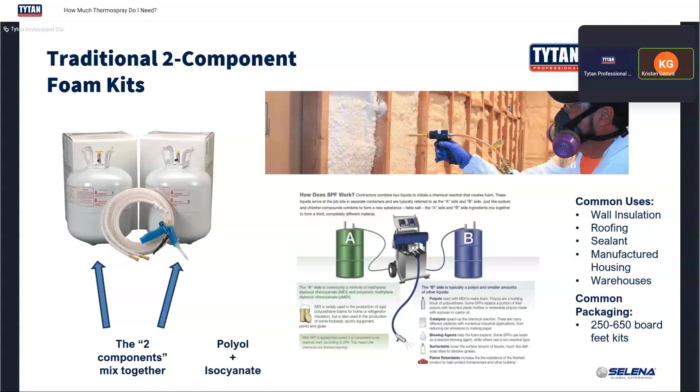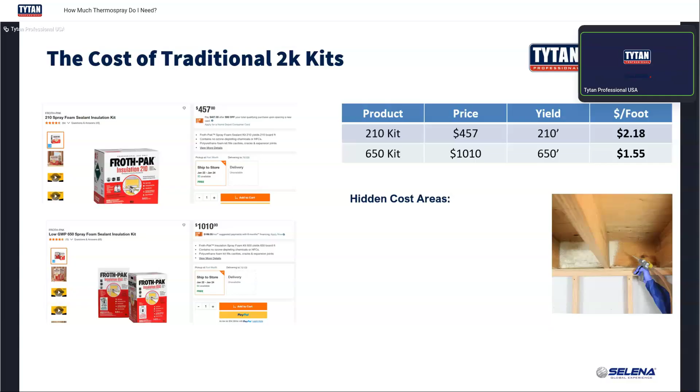Thank you, Kristen. We identified some areas where these two-component kits just aren't serving the full need for the professional insulator. You can see I calculated a cost per foot over there on the right, which is what you're typically paying. But there are also some hidden cost areas, where you're wasting money that maybe you didn't even realize.

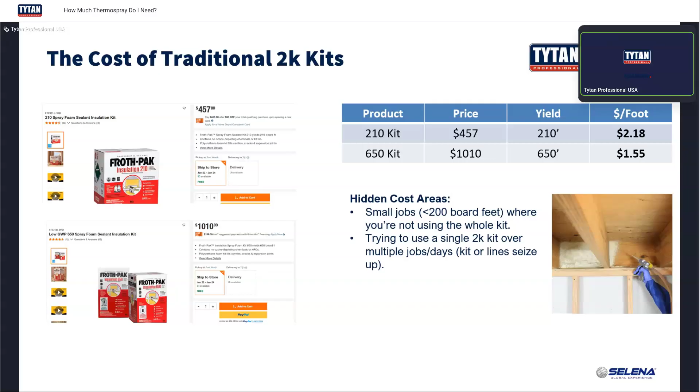So what about small jobs? If it's less than 200 or 500 board feet, where you're not using that whole kit, you're left with leftover material that might cure. If you try to use that kit over multiple jobs or days, the kit or the lines can seize up, and now you just have to throw it away. That's wasted material, maybe 100 or 200 feet worth still inside the canisters. This gives you an idea of what costs are involved.

So we developed this product, Thermospray. It can repair and or replace the two-component foam systems. Maybe you're having to fix an outlet in a new build and need to spray insulate just a couple of square feet. That's what Thermospray is intended for. It also has sound blocking properties, as Kristen mentioned with the acoustic nature of it.

So let's look at a quick case study where you can see how it got applied to my shed. Earlier this year, I insulated my shed with Thermospray.

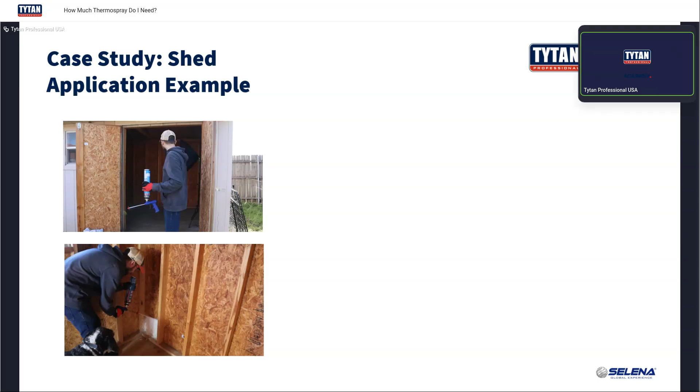But you can see I'm spraying it here, and you can see what one of the walls looked like.

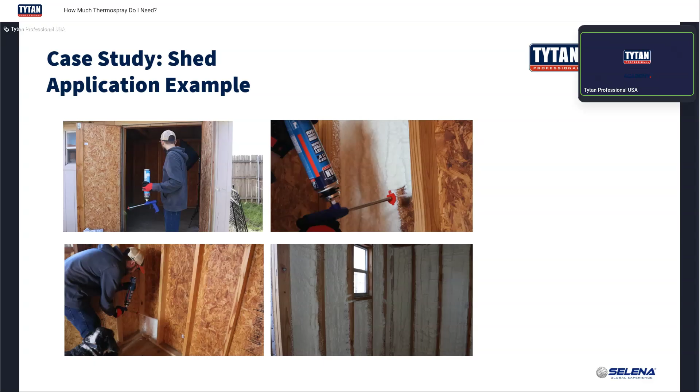But it's perfect for this sort of project, as you'll see. You can see we did all the walls on my shed there. So for this sort of project, let's run through, let's say you decided to use any of these three for this project. So you can see the 210 kit, 210 board feet coverage, the 650 kit, or Thermospray, which is 21 board feet per can. And so the coverage I needed, it's an 8x12 shed, but it was about 315 board feet of coverage that I needed for my project.

And so let's say I use the 210 kit. Well, I'd have to use two of those because you can see it's more than 210. Or the 650 kit, I'd use one and have roughly half left. Or I can use 15 cans of Thermospray. And so the cost, just MSRP, you can see here the different costs. And with Thermospray, you don't have any leftover material.

If you bought like 2 cases of it, each case has 12 in a box. You might have a few cans left over, but they store very well. You could store it for maybe a year, and so that's a lot more convenient. And you're not worried about the lines seizing up on you.

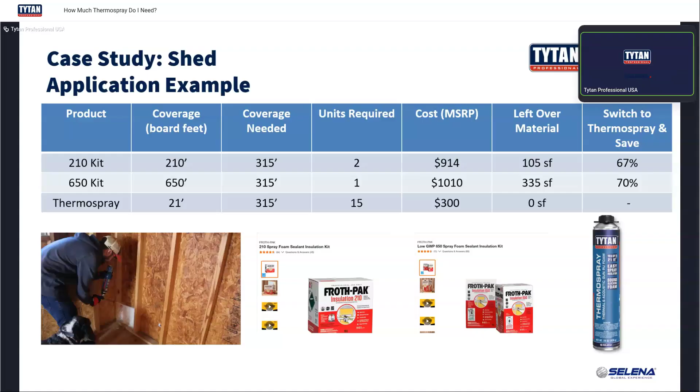Okay, so now we're calculating how much Thermospray I need. So I've thrown around a couple of terms, board feet. So that's really just a square foot that's 1 inch thick. And so you can see the different bays I'm spraying there in that picture. But basically you calculate the total board feet, divide it by 21, and then that's how many cans you need.

So you can see if it was 200 board feet, divide that by 21, that's like 9.5 cans, so roughly 10 cans. Maybe you want to spray it a little thicker and you need more. I sprayed it at about 1.5 inches or almost 2 inches on my shed. But again, it depends on how thick you want the insulation and what sort of R value you're going for on your project.

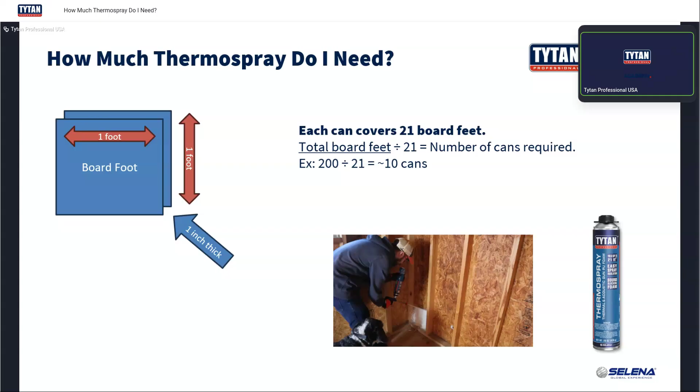Okay, well, that's it for this webinar. This is a short one, pretty simple, but again, calculating how much Thermospray you need. You really just need to figure out how many board feet you need to cover, and then you can divide it by 21.